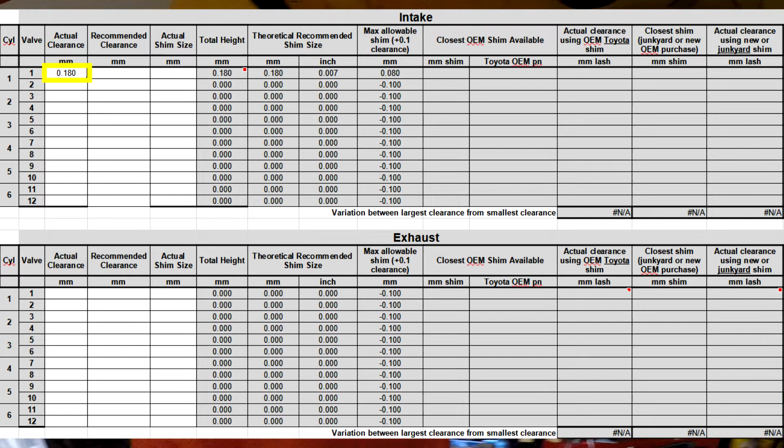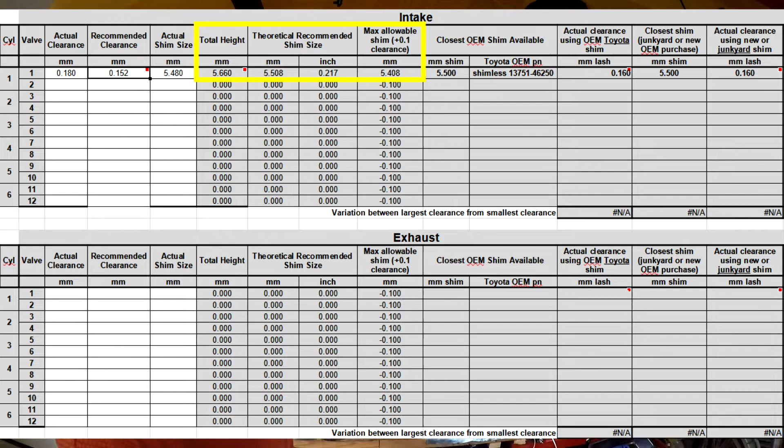Not only does it do the calculations whenever you put in your measurement that you get from your feeler gauge, along with the measurement when you measure the thickness of your buckets. And then you put in your ideal valve lash that's either in your Toyota service manual or what's on your cam card. And once you put those three measurements in, the spreadsheet does everything for you for all 24 valves, as long as you put in measurements for each one of the 24 valves.

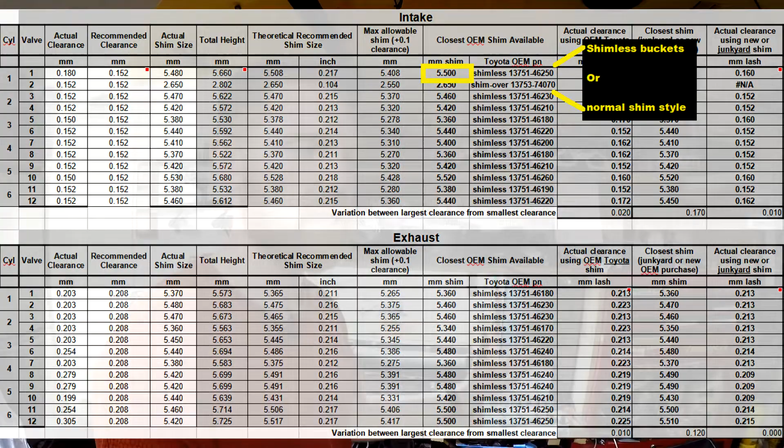It also gives you the Toyota part number associated with that shim size, and then trying to see what shims I will put in. And yes, this is a long video, but it's a long video because it's a long process. And if you're pulling them from a junkyard, as I am, before you click away from this video, I'm actually going to show you later in the video how to inspect the junkyard shims with a laser pointer, and depending on how the light scatters, you can tell if it's bad. Just running your finger over the top of it is not good enough.

So I'm going to be showing how to do that, along with not the entire shim process for every one of the valves, but I will be showing how it's done on one or two of the valves. I will also be swapping from the shim over bucket to the shimless buckets. And the reason I'm doing that is because I'm running an oversized camshaft that has larger lobes. And basically, if you don't know what that means, then you probably have a stock camshaft, and you can just go through the entire shimming process like normal and use the shim over buckets.

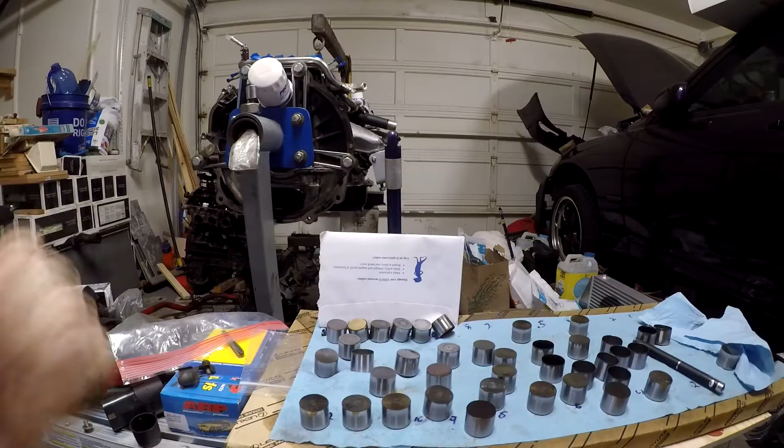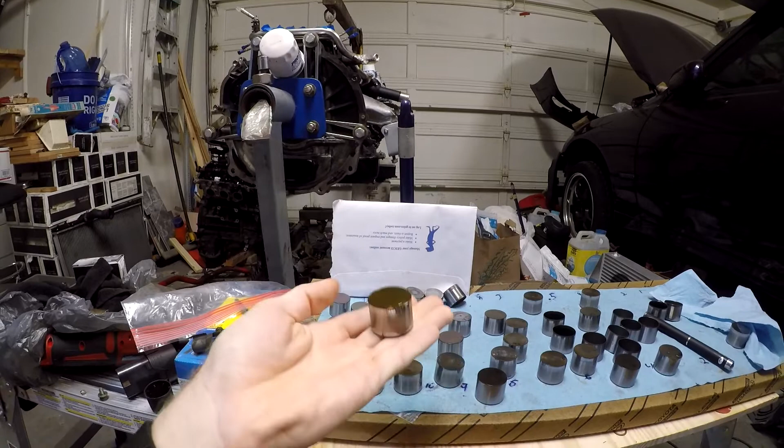And just to talk about the reasons really quickly that I'm upgrading to these shimless buckets versus these shim over buckets, one of the reasons is the weight of them. So if you feel the weight of this, I just measured it and it's between 1.5 and 1.6 ounces. It kind of bounces back and forth, where this one is almost right at 1 ounce. So you have a considerable weight difference.

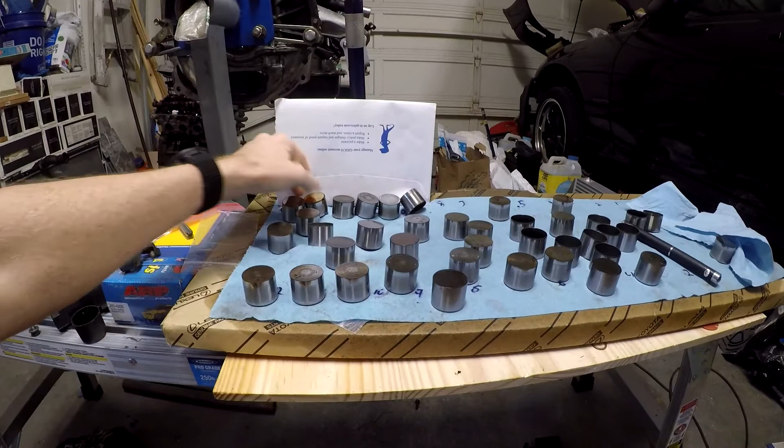And if you're thinking 24 of these is going to be about 24 ounces, where 24 of these is going to be 30 something, 36, 37, 38 ounces, 40 ounces. So there's a considerable weight difference between these two. So they're lighter, you have less metal mass. Another reason is on larger cams, these, so on mine these are gold, but they're not always gold. They're sometimes just the same steel color as this.

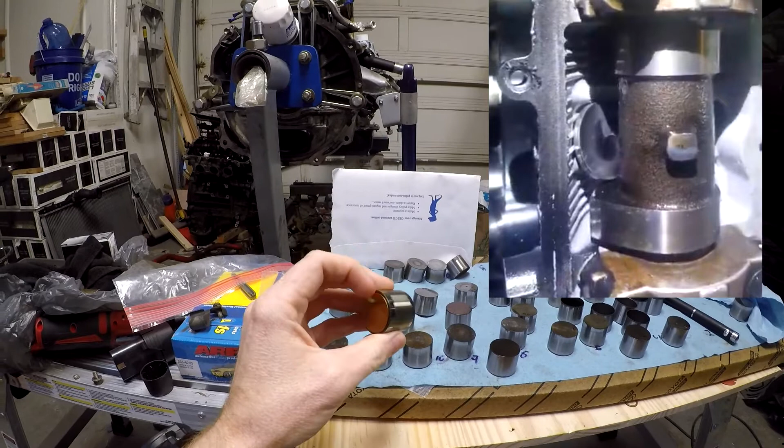So what ends up happening is if you upgrade your cams and your valve springs, then this is fairly easy for it to pop out of place and pop out of the bucket, and then you have a shim that's floating around in your head and just wreaking havoc. And this is a very tough steel. I don't know about these particularly because they're the golden ones, but normally this is a tool steel, so it's a high grade steel. And if this is floating around in an aluminum head being squished by a camshaft, it's going to destroy a bunch of stuff. So there's that.

But one of the cooler reasons is this. If you look at the top of this, there's a lip from the edge of the bucket to the top of this shim. So these shims are 28 millimeter shims, which means the top of this, the only surface that your cam lobe touches, is 28 millimeters. Where this is 31 millimeters.

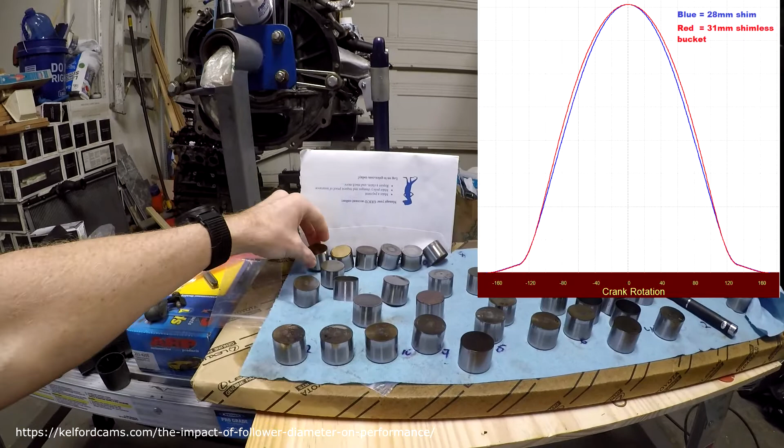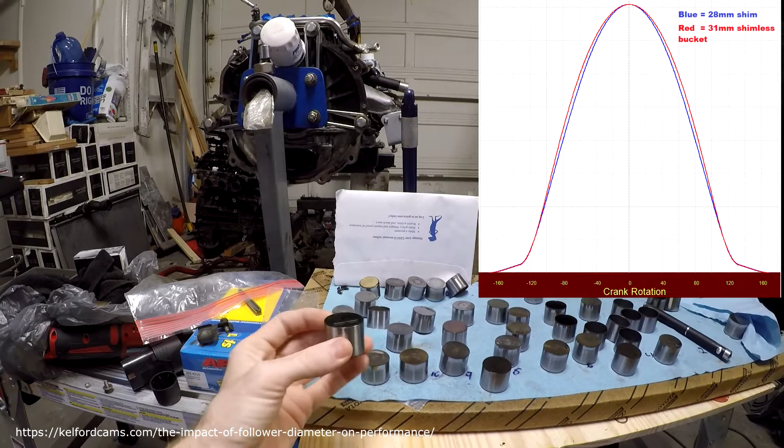And I have a little graphic popping up that I pulled from kelfordcams.com, and they have a whole article on this basically, but there's a slight performance benefit to upgrading to these, not only because they're lighter, but because you get a slightly longer duration running these. So you'd have a slightly better performing engine because your duration would be a little bit better, since these have more of a contact surface on top than these do.

I'll also be showing how you measure it. That's with the dial indicator. It's a magnetic base dial indicator, and I have it stuck to the top of my toolbox. So I'm going to set up my tripod and I'm going to start going through the head, unbolting the cams.

Take extreme caution while you're unbolting your cams. I like unbolting them a quarter turn at a time. The book even says to unbolt them sequentially. The book even mentions a pattern that you're supposed to follow to unbolt the cams. Loosen them a quarter turn at a time, and then slowly lift them out.

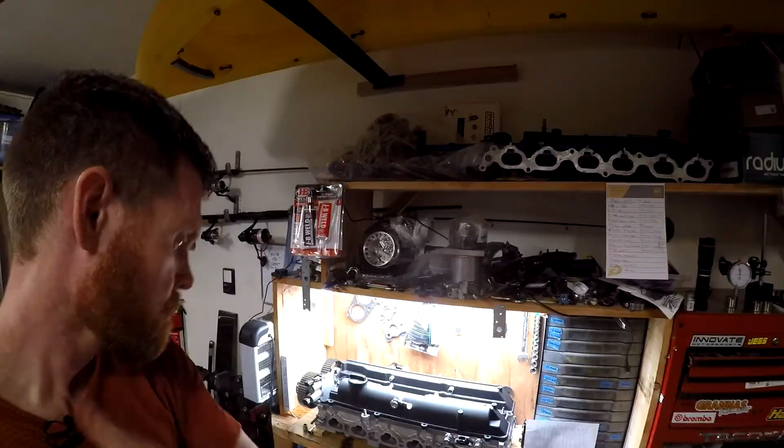So getting into this, here I am slowly rotating the camshaft via the bolt that's on the very front of the camshaft that holds the cam gear in place. And what I'm doing is I'm taking my feeler gauge and I'm measuring the gap between that cam lobe and the bucket. So the smallest side of the cam lobe, as it comes close to that bucket, there's room for error here, because if a feeler gauge that's 0.203 goes in, but the 0.229, which is the next one up, does not go in, your valve lash can be anything between 0.203 and 0.228.

That's why it's a good idea to actually swap your buckets around a little bit and then measure again to get 2 different measurements, because with those 2 different measurements, you will have 2 different valve lashes with 2 different bucket sizes. If you compare those 2 sets of numbers together, you can find a measurement that's a little bit closer to being accurate than you would if you had just measured with 1 bucket and 1 feeler gauge. I'll show that in the spreadsheet a little bit later, how you can use the spreadsheet to determine what a more accurate shimless bucket size or shim size is that you should be putting in place of the other one.

I'm going to loosen every one of these sequentially. It's going to take me probably 5 minutes to get this camshaft unbolted because I'm going to take my time with it. These are stiff springs. Do not want to snap this camshaft.

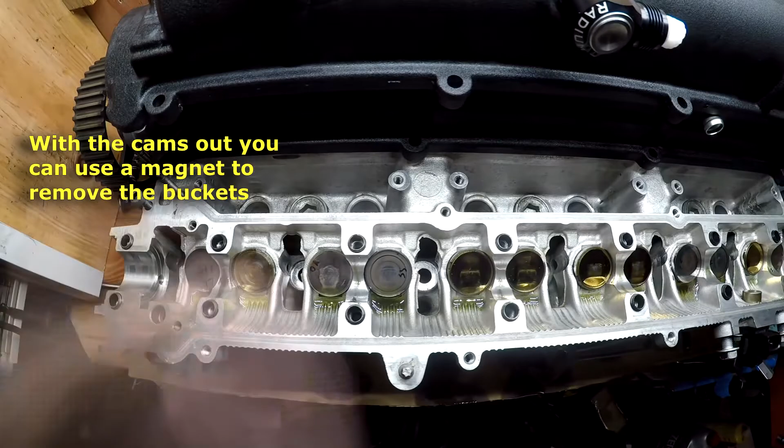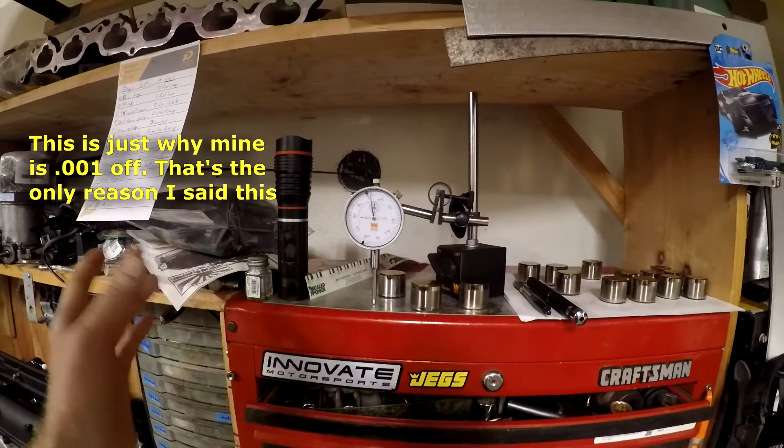And measuring the thickness of the valve bucket, since this is a magnetic based dial indicator, then at nighttime this gauge shows slightly different than it does in the daytime because the metal heats up and it expands, and then science happens and you end up with a slightly different gauge.

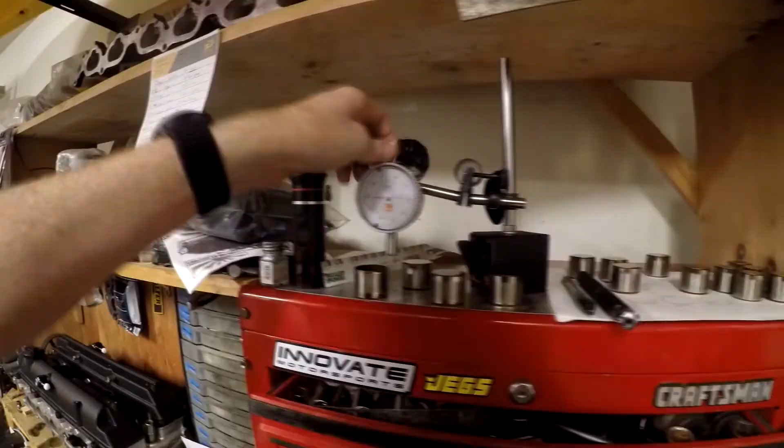One, the top has to be clean, so I'll clean it off. Trying to put it on the little dot. I put this right in the middle of the dot. So this one, I just add 0.001 to this. So this is 0.213 thousandths of an inch. So 0.213 thousandths of an inch.

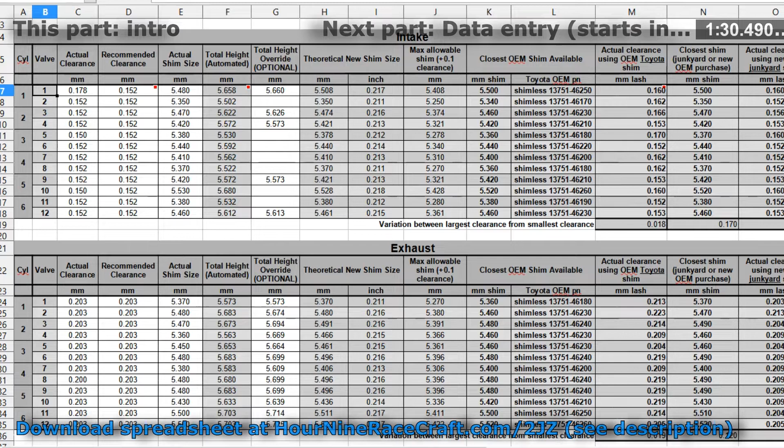Or if you want to custom tailor this to, say, a Ducati that has an opening shim and a closing shim on one valve, I'm going to talk about that at the end of this video. So you can jump through to the end if you want to see all the details and how all the calculations work and how I built this.

And another thing that's worth mentioning is I have added in the functionality for the shim over buckets, so you don't have to enter in this total height of this entire bucket plus shim size. You can actually just pop the shim out of the bucket if you want to, and you can type that in. And if you want to just replace those shims or figure out what it is, so if I did 2.75 and that's my actual shim size, and if I come over here, then that's a shim over bucket, then closest OEM shim available is also telling me 2.75 because these two numbers are the same.

But if my measured clearance that I get with the feeler gauge is different from the recommended clearance that I want the engine to be, then it would give me a different shim size. But this is the part number, and I could go and Google that part number and find it, buy it, whatever, and then wait on it to come in the mail.

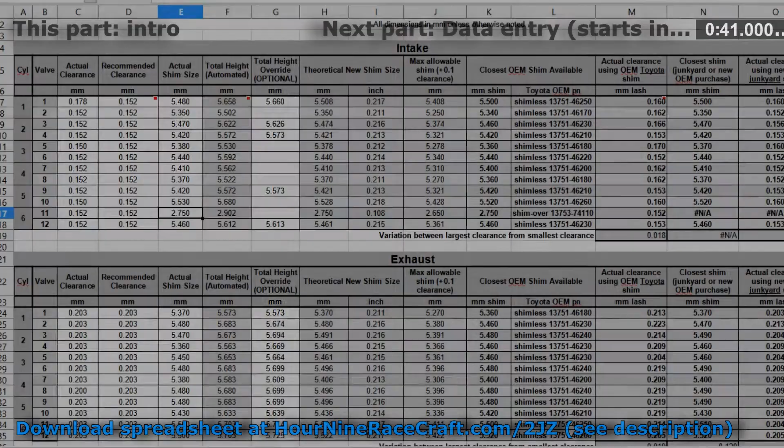So right now I'm just going to breeze through really quickly and then show you the absolute basics of how to use this spreadsheet that I've built, and what numbers you need to put in, what cells, where you get those numbers from, and then where you look at the calculations, what your shim size is, and then how you can take these numbers for the shimless buckets that the spreadsheet gives you, put them in Google, search for them, wait for them to come from whatever website you order them from, and then put them into your engine. Immediately after that, I'm going to talk about the more detailed process of how to precisely dial in that shimming process. And it takes a few more steps, but it is far worth it in the end.

So jumping into this, the first thing you're going to do is, like I said a little bit earlier, if you remember, I measured that shim plus the bucket and I got 0.213 decimal inches. Well, I'm going to go over here to the right and I'm going to look up on this little calculation section 0.213 and then see what that is in millimeters. That's 5.42. If you have a number that doesn't show up over here, then unfortunately you'll have to Google it. So I'll take this 5.42, I'll come over here, and in this cell for valve number 9 on cylinder 5, 5.42 is the measurement that I would put into this cell because that is the actual shim size as it says up here at the top of this column.

So you would do that same process for every one of these, put all of those different measurements in whatever valve, like whatever place it goes into in the head. Valve 1 being all the way up by the cam gear, and then valve 12 being all the way at the very back of the head.

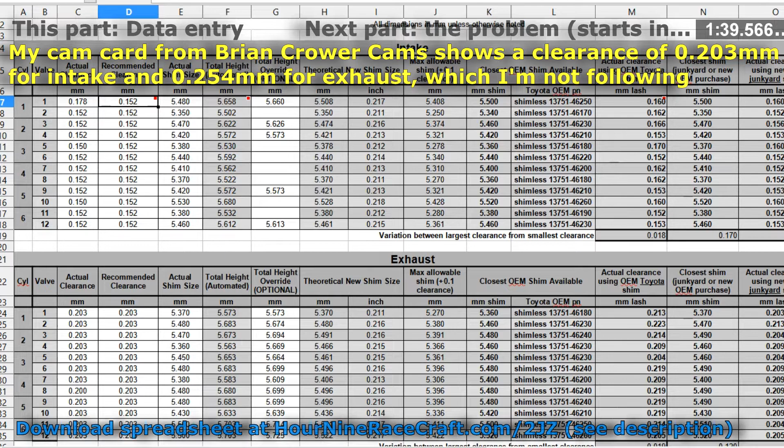And then after I put this recommended clearance in, the spreadsheet does everything for you. It calculates the total height, which is your actual shim plus your actual clearance, and then it subtracts it from this recommended clearance, and it gives you this theoretical number. This theoretical number is if you could find a shim that is exactly this size, that's the one that's going to go in your engine.

Unfortunately, you probably won't have a shim that's exactly this size, or if you're measuring them all in with a micrometer and it's in thousandths of an inch, you can look over here and see what shim is needed, and then just look at the shims that you have and then put the ones in that place, order the rest of them. Or you can come over here to the side where the closest OEM shim available, this is the Toyota OEM parts, and you look up this 5.50 Toyota shim size.

Here's the part number, 13751-46250. I've actually ordered that one, but Toyota 13751-46250. It comes up. Go down here, McGeorge Toyota. This is the cheapest ones that I could find. They're actually $15. So you could take it, add it to cart, and then go back to your spreadsheet and then do the same thing for this one.

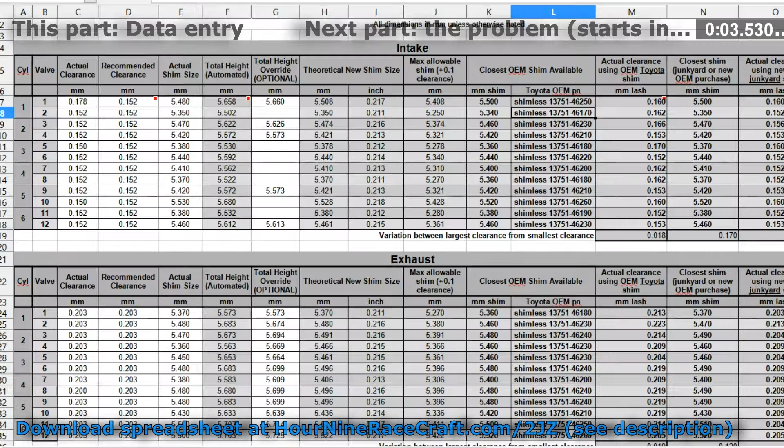13751-46170. Go back here and you can actually type in their website. So type in the part number, there's another one, add it to the cart, and you can keep doing that for all of the shimless buckets until you get all 24 of them.

But the problem with this is if you follow that exact same thing that I just said, then there's a little bit of an issue because I don't know what your feeler gauges are like, but if you look at mine, my feeler gauges go from 0.152 to the next one up is 0.178. That means there is a 0.026 difference between these two feeler gauges. That's a little bit of a problem.

So that 0.026, if I come over here and I add 0.026 to this 5.34, that's 5.366, or it would really just be 5.36. So what I'm trying to say is this actual clearance here of 0.152 can be anything between 0.152 and this next number up, which is 0.177, the thousandth below this feeler gauge. The 178 feeler gauge will not go into it if it's a 177 clearance.

So if I look at this actual clearance here and this says 0.152 millimeters, is that really 0.152 millimeters or is it 0.172 millimeters? Because if it's 0.172 millimeters, then that is 0.02 millimeters higher than what I actually think it is when I look at this actual clearance here.

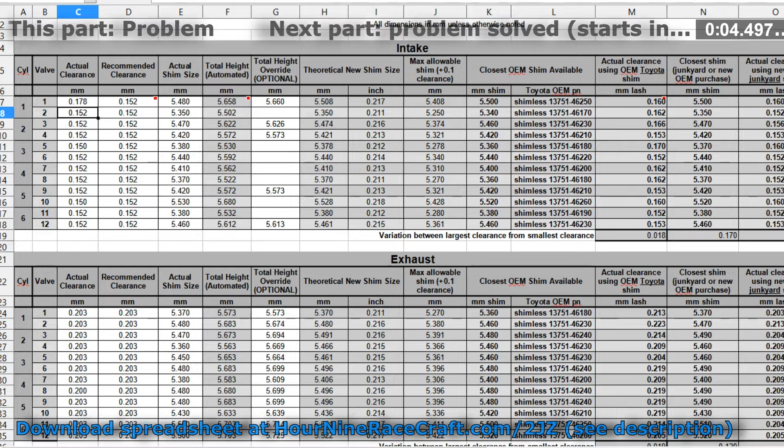That's a problem because if I look at this closest OEM shim that's available, a 5.34 shim or a 5.32 shim, which would be 2/100ths of a millimeter, 0.020, you just subtract that 0.020 from this 5.34, that's 5.32. If I put a 5.32 shim in here, it should show this same exact measurement. It'll show that same exact clearance. So I'll think all along that my clearance is actually 0.152 when really it could be 0.172.

Knowing that that's an issue, what I built into this spreadsheet is the ability for you to override this calculation. Now what this calculation is if I click on it, it's these two, this red and the blue cell added together. So it's your actual shim size that I measured with my dial caliper earlier, mixed with my actual clearance that I measured with the feeler gauge. I can override this, right?

Because my actual clearance can be a little bit taller than this 0.150, which I know this is different, 0.150 and 0.152. I actually have two different sets of feeler gauges. That's why this says 150 and this says 152. My 152 feeler gauge wouldn't fit in, so I dropped down to the 150 and that one did fit in. So I'm accepting that this actual clearance is 0.002 tighter than the other ones. It's not that big of a deal. It's only 0.002.

Anyway, this total height is this red cell plus the blue cell. Once those two things are added together, there's still whatever is between this feeler gauge and this feeler gauge. So it could be anything under 0.177. I'll just change this to 0.152 just so that it's easier to look at right now and not get confused.

But anything above 0.152, say if it's 0.177, then that would make this total height, like the actual total height, would be 5.54 something, close to 5.550. So this total height would be a lot smaller than what it actually is.

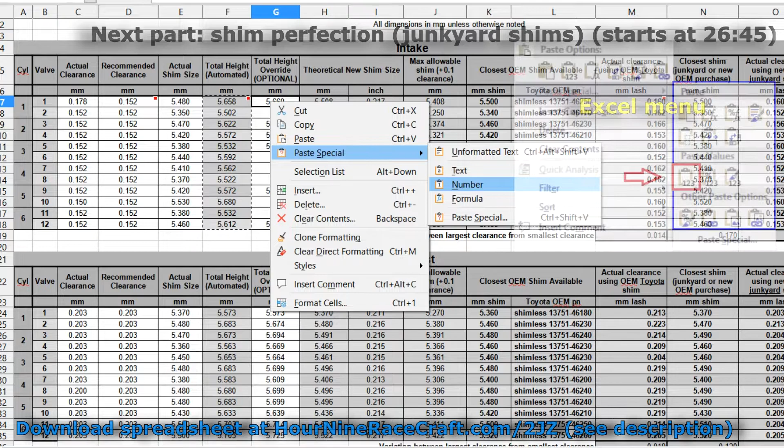Now, if you're following along in Microsoft Office Excel, then whenever you click Paste Special, you want to look for the thing that says Values. And then once you click Values, I'm overriding the data in those cells. So now it's going to put just the numbers in here where this was formulas and this is numbers.

So this is important because now, once all of these numbers are in these white cells, I can completely change all of this data here and here. And whatever was previously entered here will stay the same. And whatever shim size the spreadsheet was recommending to you is now going off of these white cells.

Once you do that, what I recommend doing is taking the closest shim sizes and swapping them around. Like, say, taking the 47 and the 48, swapping those, and then taking the 35 and the 38, switching those, putting the 42 and the 41, swapping those around. You get the idea. You swap these shims around with the closest available sizes.

And I say to swap them with the closest sizes because what you don't want to do is put one of the shims in that completely takes away your clearance that you have over here, and then you have the bucket that's pushing on the camshaft. You don't want the bucket pushing on the camshaft. That could actually cause problems. So when you swap them around, just try to stick with close sizes.

As long as you have a bucket in that position, and if you don't have any buckets that you could swap around, so like if there's nothing close to a 53, then just leave it there. Swap the 53 with the 48 later after you're done swapping the 48 with the 47, something like that, right? So this gives me the ability to look down this spreadsheet and say, okay, all of these numbers, now that they're moved over here, I'm going to go through and redo all of this.

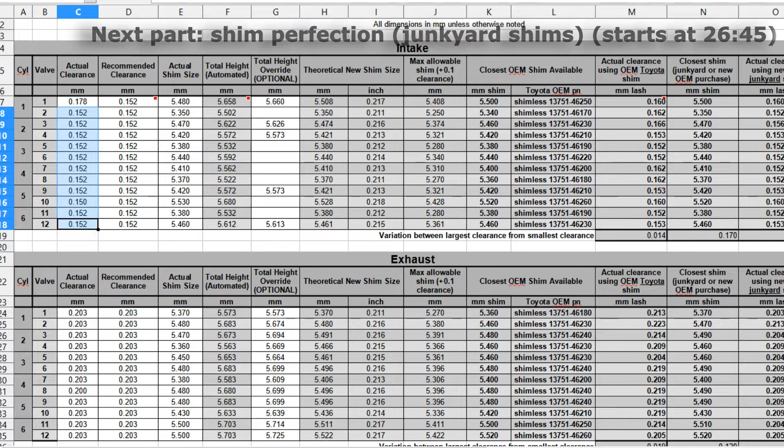So then you can take this, come over here, and then you can look at your closest OEM shim that you have available, look up these part numbers, Google them as I was showing earlier, add them to your cart, wait on them to come in the mail, put them in your engine, and then after you put them back in the head, you still want to go back and measure with the feeler gauge again, just to verify that the end result is 0.152, if that's what you were aiming for. So that's how you would do it with ordering the Toyota OEM shim.

If you wanted to be slightly more precise, in my case, some people probably wouldn't agree with this, and I wouldn't blame you for not agreeing with this, but I'm using junkyard shims, and the next part of the video after I'm explaining this spreadsheet, I'm actually going to show the junkyard shims that I'm using, and they are in incredible shape. They practically look brand new, because I found some that were from a 40,000 mile Prius that was totaled and in a junkyard, and the majority of those are the ones that are now in my engine. 5.35, 5.47, 5.41.

A lot of these odd numbers that are listed here came from that Prius, because on the Toyota assembly line, I talk about this later, you have odd numbers and even numbers that go into the car. That way it's more accurate. If you just go online and buy the parts, these shimless buckets are only going to go up in increments of 0.02 of a millimeter. So 34, 36, 38, and then a 40. They're all going to go up in increments of 0.02.

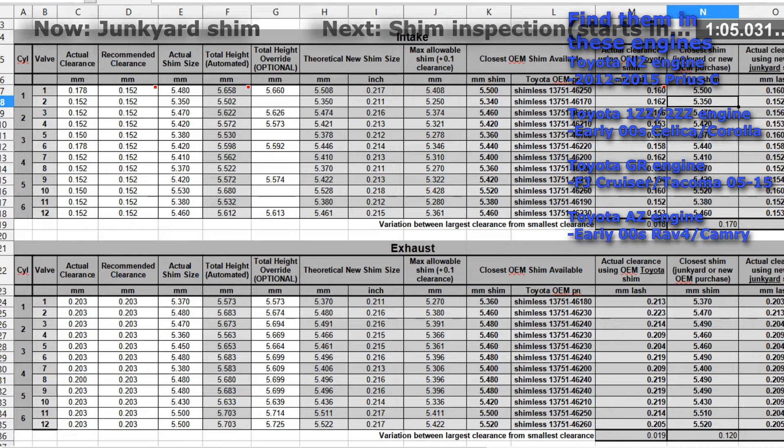I want mine to be a little more precise. So I want to go up in 1/100th. So I'm putting the 37 or 35. Or if they're an even number that didn't come out of the Prius, then I would order those. I think I only had to order 6 buckets. So I ended up lucking out with this because I have a ton of odd buckets that I can use that came out of that Prius engine. So those allow me to dial my engine in a little bit more precise, and I like that.

I like that when I look at my actual clearance over here that was measured with a feeler gauge, I feel pretty comfortable in knowing that, okay, I dialed it in. I have my shims, they're pretty accurate. I've swapped them out, and I've got my total height calculated for each one of these valves in the engine. And I have my recommended clearance here that it's subtracting from this total height.

So that's giving me the ideal shim, not only the Toyota part number that I can go online and order, but if I want to pull one from a junkyard, I can use these sizes here. So the 5.35, 37, 37, all these odd numbers I can use in my engine to give me the most accurate valve lash.

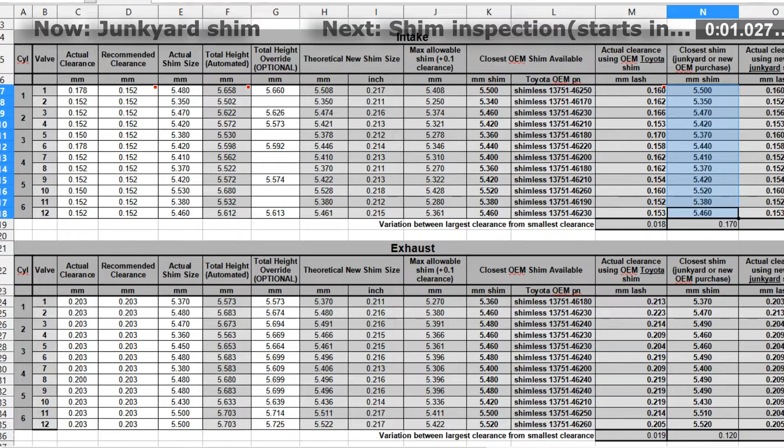This is my collection of shimless buckets that I've gotten from the junkyard, or I've gotten on eBay from low mileage vehicles. And I've gotten them all for a pretty good price. I'm not gonna brag, but I've got them all for a pretty good price. So why would you want to use these shimless buckets from a junkyard? Well, I like being very precise.

And if you look at this one, if you look at the number on the inside of it, this is a 37, because coming off the Toyota assembly line, off the factory floor, they had odd and even numbers. If you go online right now and you try to find a 37 bucket, you're not going to be able to find it unless you're somebody selling it used on eBay or whatever. So these 37 buckets, this is 5.37 millimeters, but these only came off of the Toyota assembly line.

All the other ones are going to be like this; this is an even number one, so this is 5.38. So if you want to be a little more precise, you want your valve lash dialed in a little bit better, you can use these. You have to pull from a lot of different engines in order to get all the sizes that you need, but eventually you will end up with all the sizes that you need.

So what engines are these from? So these were actually from a 40,000 mile Prius engine that was just totaled, but it only had 40,000 miles on it. So when you look at the top of it, they look practically brand new, right? And I'm going to show how the light scatters in a second, but those are actually in better condition than these, which also look really good. But these were the original ones that came out of my 2JZ head that I'm working on right now.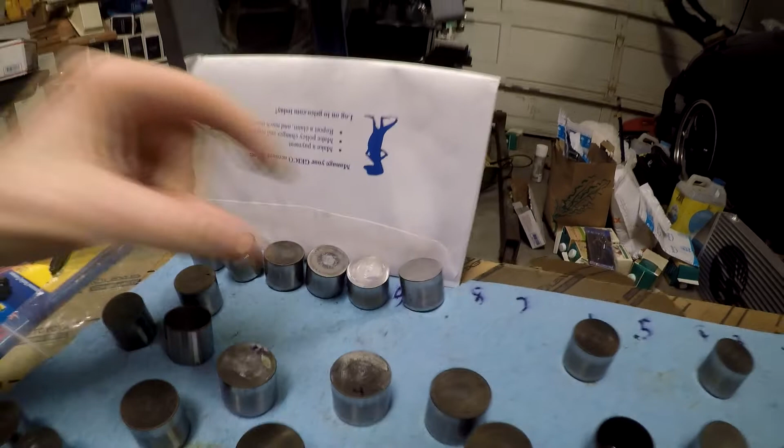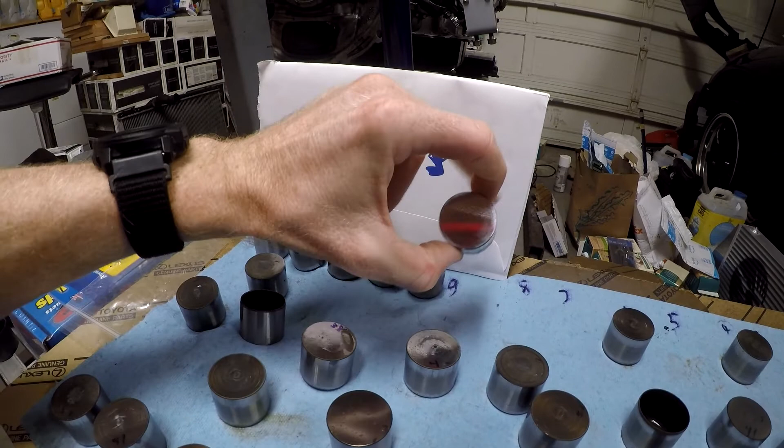If you look at the reflective surface on it, there's still some scratches on it. I probably could have gone up to 2000 grit and then used metal polish a little bit more, but this took just a few minutes to get it to that. And I was doing it by hand, not by any machine or anything.

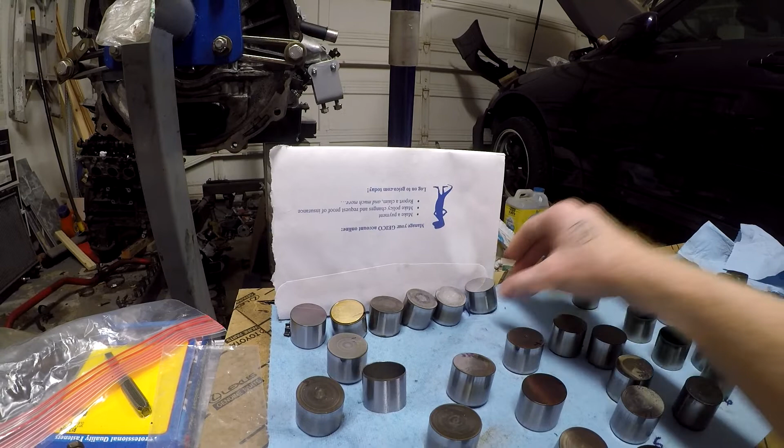I measured this one; this one was originally a 42, so it was 5.42 millimeters. And when I measured it again, my dial indicator shows it as a 0.212, which 0.212 is 5.41 millimeters. So I've changed it essentially to a 41 now. So if you wanted to sand the bucket down, you can.

The sides of these are a little more worn, right? Because it's been in a sludge engine, and this one actually has some surface rust developing on it because I didn't plan on ever using it in an engine. But can you do that? Yeah. Is it a good idea? Maybe. Going through these buckets though, just starting with the Prius one first, since that one is from the NZ engine, you look how the light is scattering off of it.

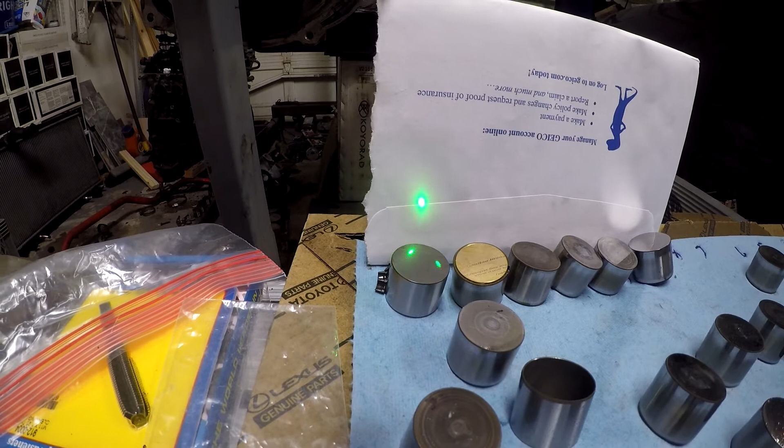Looks actually kind of good, right? There's no weird swirls that are coming off. It's reflecting a perfect dot on the white paper. Coming over here, running this across this shim bucket. So this is one that was from the 2JZ engine, one of the original ones that was in the 2JZ engine. So you look how the light's scattering across it.

It's kind of making those little swirls, right? Some of that's probably going to be fingerprints because I didn't clean it off well enough, but that's what it's going to do. It did look a little bit better than this before I put fingerprints on it, so my apologies for that. I probably should have cleaned the top a little bit better.

This one that's from the AZ engine also has a little dog hair. I'm not sure if you can pick that up, but my dog hair gets everywhere. So light's not really scattering in a really weird way, right? It's scattering mostly normal. Come over here, this one's a little worse. It's getting a little bit more light scatter, but it's not too bad.

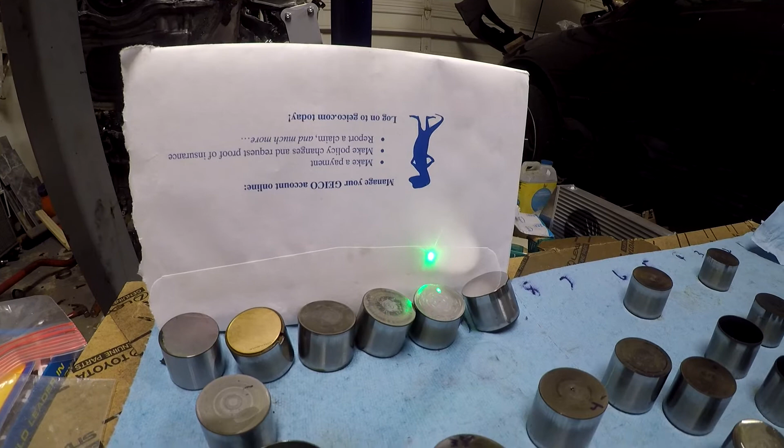And then going over to this one, that is just crazy. So the way the light is scattering on that, it's like it's alive. That just looks bad. I would not ever use this in an engine unless I'm only planning to run it for 1,000 miles and just destroy my cams, because this is going to wear your cams pretty quickly.

And this one was just like this one, but I ran sandpaper across it. 400 grit, 1500 grit, and then the Mother's aluminum polish. This is not aluminum, I was just using the aluminum polish on it because it's just what I had. So you can use better materials. You can probably use a metal polish along with 2000 grit sandpaper, maybe 2500 grit sandpaper, and then polish this up even nicer. But this only took a couple minutes without even using any fancy machines.

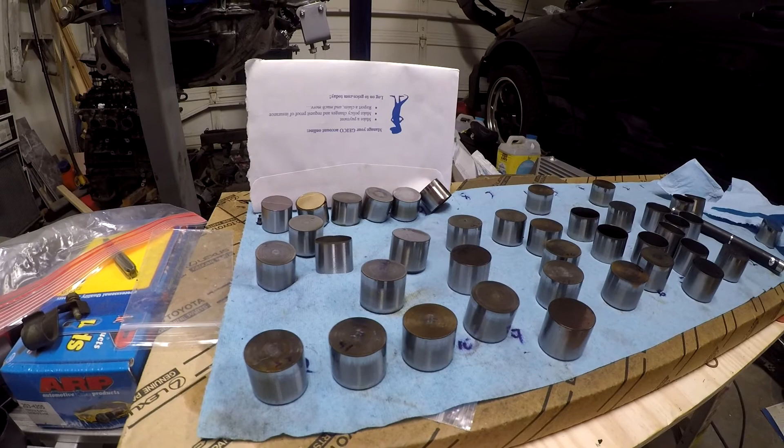So if you want some odd size buckets, go pull them from a junkyard. You can use them to measure and use multiple bucket sizes before you order all of yours online. Or if you're lucky enough, like me, you find a Prius that has 40,000 miles on it, or any one of these engines that has 40,000 miles on it. Obviously this Prius engine is going to be the newest one that has these types of shimless buckets. So if you could find one of these in a junkyard, save these. These are just in incredible shape, 40,000 miles.

So now let's look at all of the really deep details of how this spreadsheet works. If you want to make your own, if you're watching this video, I don't know, 20 years from now and my website's not up anymore, so you can't go and download the spreadsheet. How does that spreadsheet work? Well, I'm going to walk you through everything that I can think of on this spreadsheet. I'm going to go left to right, top to bottom, and go through every little thing.

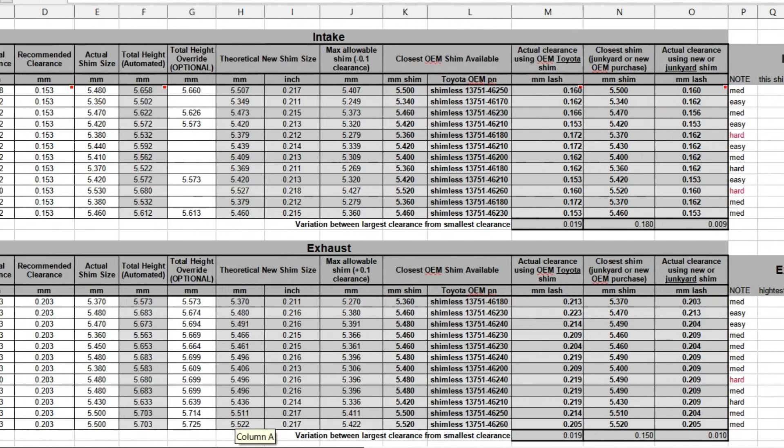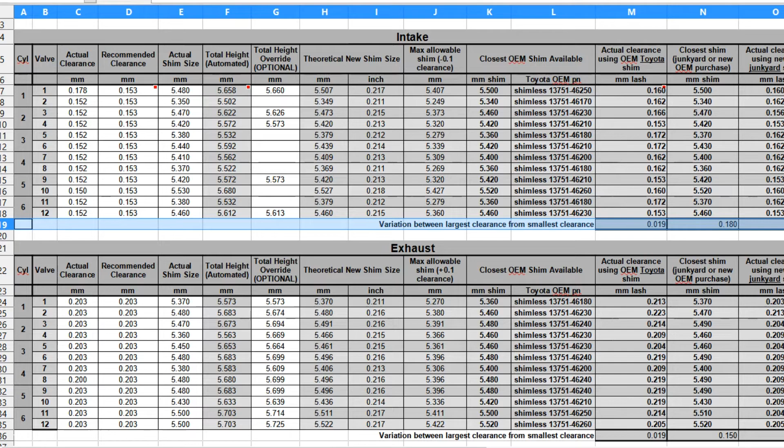So yeah, that's the entire spreadsheet and how it works. If you want to expand it out and add to it, the quickest way is if you click on the numbered column, the ones that are built into Excel, and you highlight the whole row, then you can insert rows.

Again, this is LibreOffice and not Microsoft Office Excel, but you can insert rows above. Excel works the same way. So you insert and it adds a bunch of blank rows. So what you can do now is you can take all of this. So like 6, let's say I want to make this 7 and then 8 and then 9, because I have I guess a 9-cylinder engine. Sure, that makes sense.

And I'm just clicking the merge and center button. It looks a little bit different on Excel. So 11 and 12, I can highlight those two if I want it to continue on and do 13, 14, 15, 16, 17, 18. And I just drag down and I have all those numbers. Since this is a formula, I'm going to click on this bottom right again, click that and drag that down. That expands the formula out.

So anything that's entered here, it calculates. And then these are all formulas also, so I can highlight all the way across and then click the bottom right and then drag down. And when I do that, it gives me all of these numbers. This says #N/A because there's nothing there. It's not applicable.